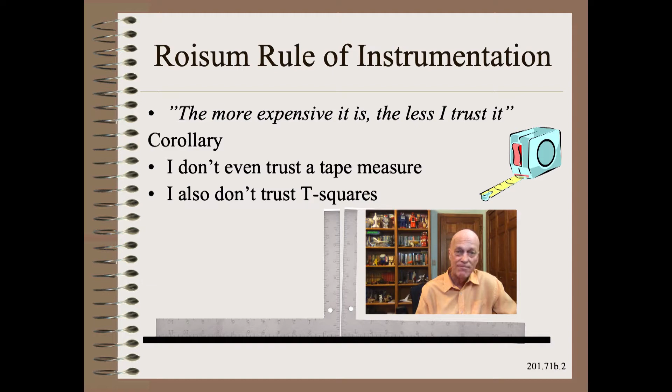The strip tensile strength is one of the three most common tests in the web industries for products as diverse as tissue and steel and everything in between. This test instrument can often yield other useful material properties with a bit of setup and software cleverness. The grab tensile is more common in the textile industry, and we had plenty of not so good words to say about that test in

Web201.69h. The tensile is so well covered in the literature that we only need to point to some references, such as our must-have 750-page Web Handling Handbook as a starting point. Still, well covered does not mean well understood, as we will see.

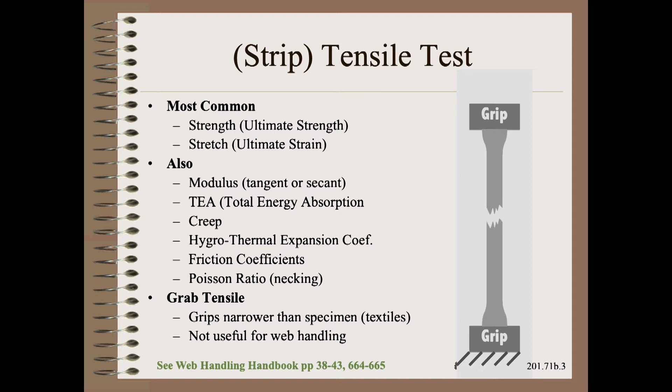Though tensile test instrumentation itself can be pricey, the tensile test is easy enough to perform. There are many motivations for tensile testing, some good and some maybe not so good. Perhaps the most common by far is that we measure tensile tests because Grandpa measured it. However, just because Grandpa did it does not necessarily mean that we should do it too.

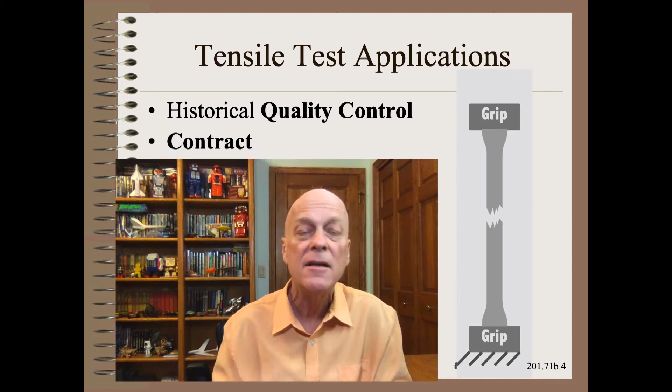A much more concrete motivation is contractual agreements. If you or your customer have written into their grade specification or purchase agreements any mention of tensile testing, then you had better do it too, even if it does not necessarily have any other practical or trustworthy application.

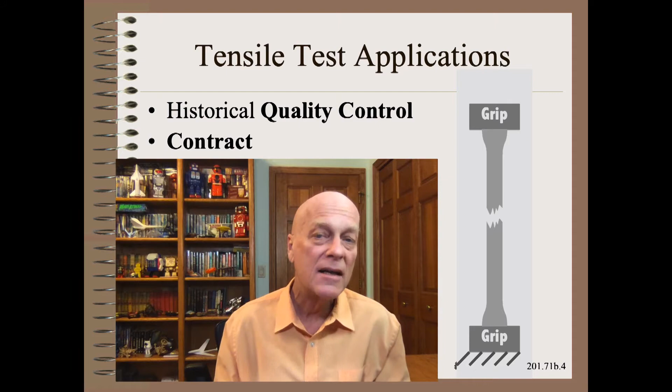Many of the other motivations for tensile testing often make assumptions that are not necessarily checked. These include using tensile testing as a proxy for more tangible concerns, such as monitoring variability, customer satisfaction, and web breaks, as just a few examples.

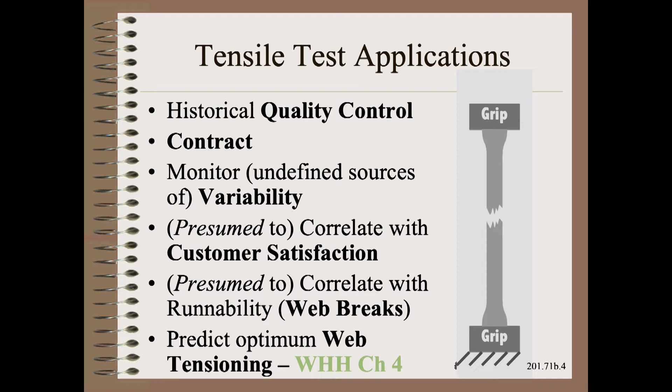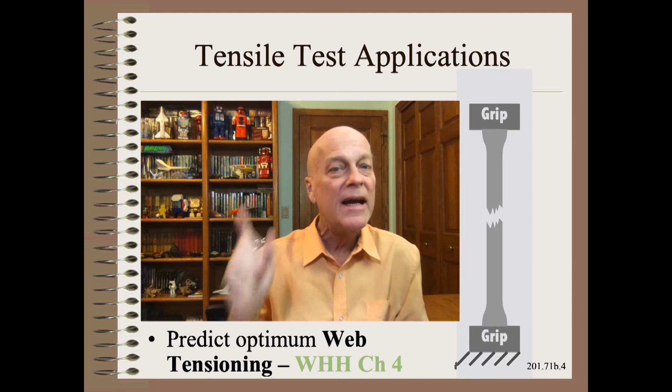In contrast, web handlers have quite strong motivations for tensile testing. That is, it can predict optimum tensioning of materials going through machines as diverse as tissue and steel and everything in between. There's a whole body of analytical and experimental science that is covered in Chapter 4 of our must-have 750-page Web Handling Handbook, as well as in hundreds and hundreds of other places in the literature.

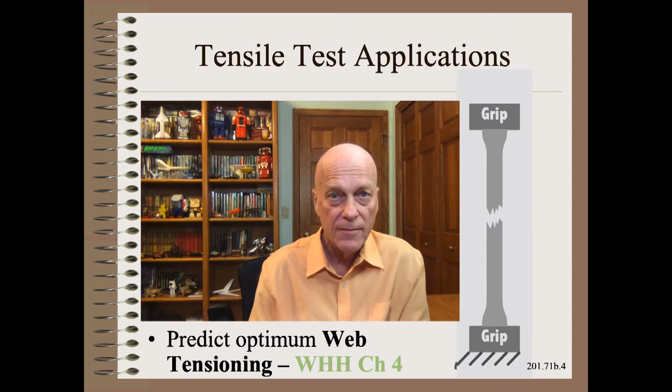I was a central figure in a horror story that I'm about to share. It involved one of the most common tensile test procedures, using one of the two top names in tensile testing equipment. This took place at a Fortune 500 company who had exceedingly strong statistical departments. I will not reveal the names here so as to protect the guilty.

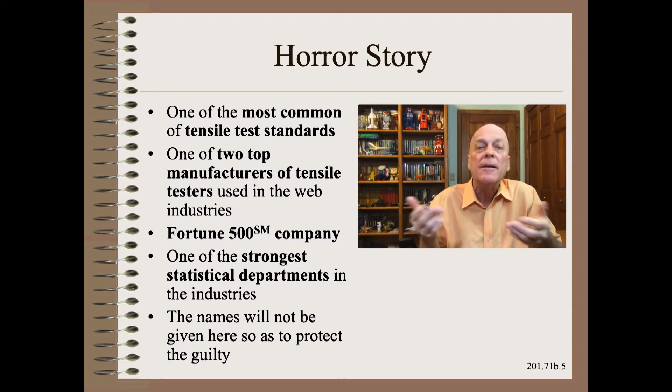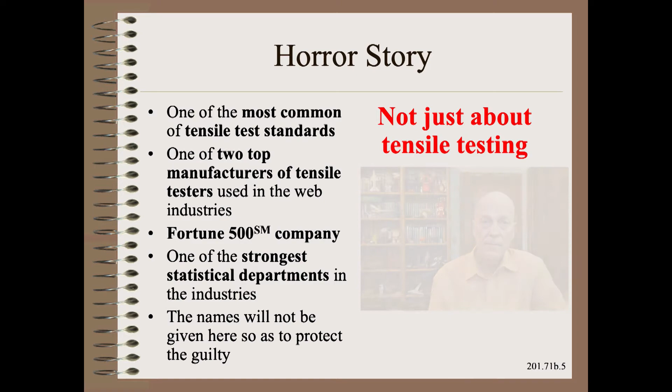However, this story is not just about tensile testing. It is about testing in general, and one of the many reasons why I subscribe to the Roisum rule of instrumentation.

I went to an ordinary test lab to get tensile test results so that I could check on web machine tension settings that were used on a converting machine in that plant. Web handlers know that a good starting point tension is in the range of, say, 10 to 20% of MD strip tensile test in, of course, engineering units.

Testing can be time-consuming and often boring. So both the eye and the mind wander looking for something interesting. And I found it. And then some.

We can make 3 well-evidenced conclusions from this event. The first was that the specimens were slipping in the stock grips because they were warped. This had happened for at least 1 decade in perhaps a dozen plants in that company alone. No one, whether test instrument supplier nor test instrument user, was aware of the issue.

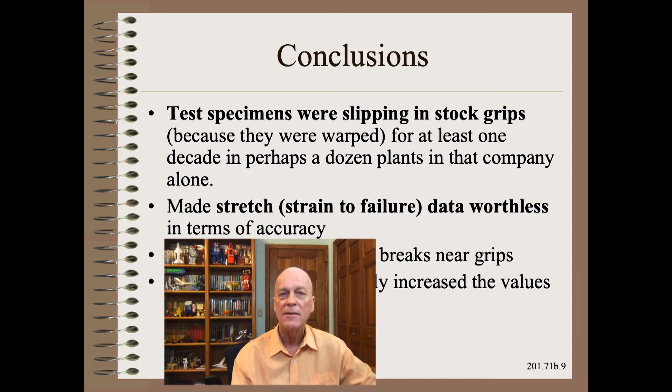The second conclusion was at least as important because it had direct knock-on effects. That was, the values for stretch, or strain to failure as it's more formally known, was worthless in terms of accuracy. It also reduced test efficiency due to the not infrequent specimen breaks near the grips, which then needed to be retested.

I would like to say that this story had a happy ending, but it did not, at least as far as I know. The first response of the test lab manager was, well, the relative results should still be good. In other words, if one specimen tests higher than another specimen, it might actually have a higher stretch. That is pretty wishful thinking, because the test values have a strong crosstalk with the precise value of the warp of that particular grip in use.

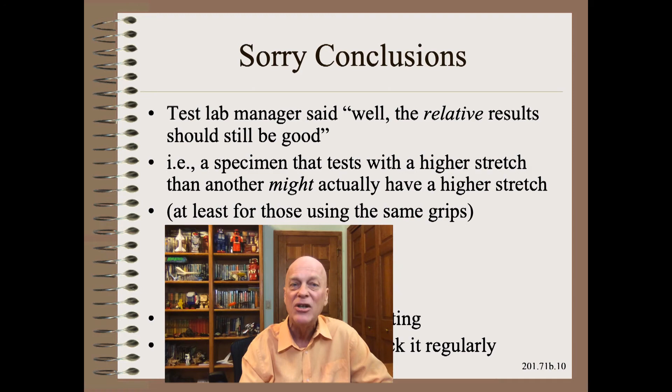Of course, this story is not just about tensile testing. It is about testing and instrumentation in general. In my 40 years of troubleshooting in plants, I have run across hundreds of horror stories of roughly similar nature, that instruments are not necessarily reading reality. Some of these were at least as serious and at least as systemic as the story shared here. The bottom line is this: don't trust instruments until someone checks them out thoroughly to begin with, and then cross-checks them regularly.